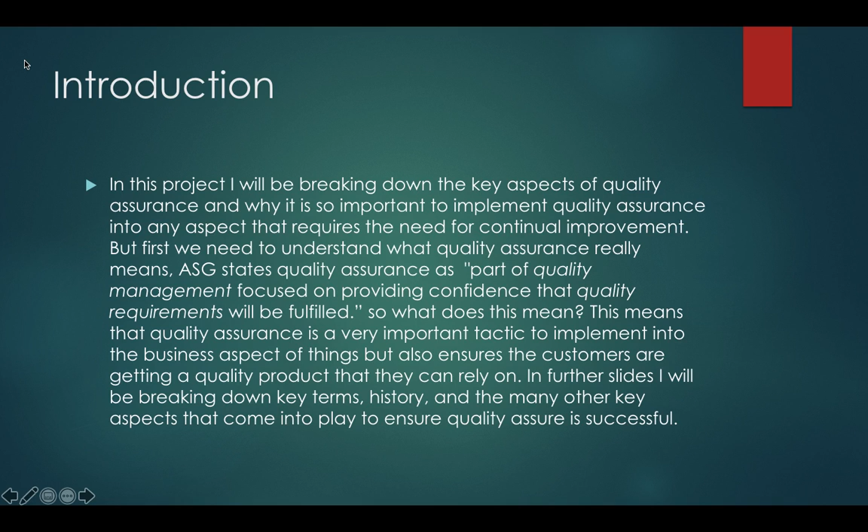In the introduction to this project, I will be breaking down the key aspects of quality assurance and why it is so important to implement into any aspect that requires continual improvement. But first we need to understand what quality assurance really means. ASG states quality assurance is part of quality management focused on providing confidence that quality requirements will be fulfilled. So what does this mean? This means that quality assurance is a very important tactic to implement into the business aspect of things, but also to ensure that customers are getting a quality product they can rely on. In further slides, I will be breaking down the key terms, history, and other aspects that come into play to ensure quality assurance is successful.

Key terms: Quality control is a system of maintaining standards in products by testing a sample of what is being made compared to what standards the product should have. Inspection is a process of measuring, examining, and testing to gauge one or more characteristics of a product or service, and comparing these with specific requirements to determine if any nonconformities exist. This can be somewhat like quality control, where we're seeing if any defects exist and what we need to do to eliminate this problem.

Auditing is a process to make sure products are complying with quality requirements and that every product is getting done correctly for quality assurance to the customer, but also to the company. This can be more than just examining the product for conformities. It can also be auditing the process being done or the team members completing the project to make sure they are being as efficient and effective as possible.

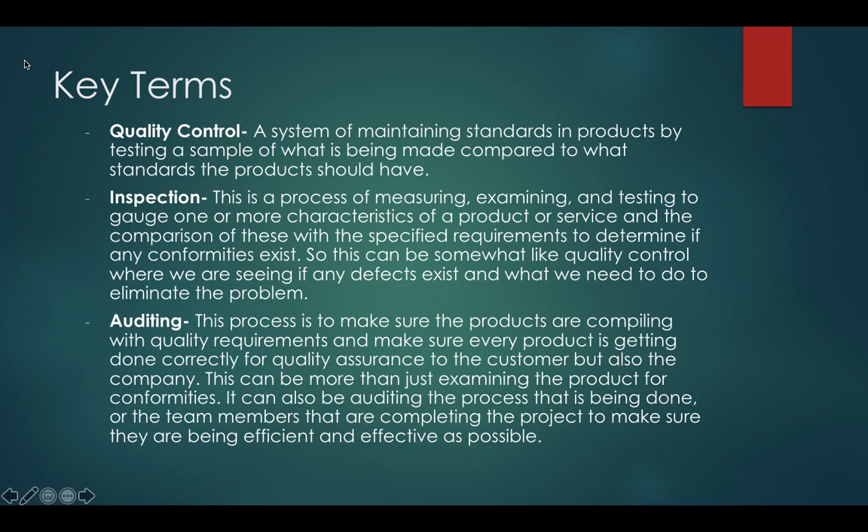Total quality is more focused on the management of people used to achieve continual improvement in customer satisfaction while still achieving low cost. Six Sigma: the concept was founded by an engineer named Bill Smith who worked for Motorola. Six Sigma is a set of tools and techniques for the overall continuous improvement of a product and the elimination of excessive waste. Kaizen Blitz is an intense and rapid improvement process in which a department or team members work together rapidly to complete a project in a short amount of time.

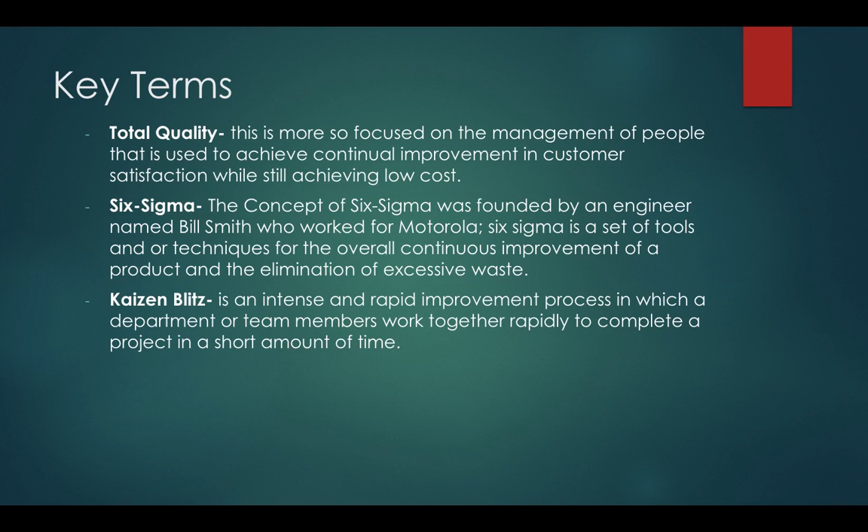History of quality assurance: 12th century. This is the first place where we were seeing quality assurance form. The birth of the quality assurance method began in the 12th century in China during the Zhou dynasty, where governmental departments were given the task and responsibility of overseeing the production and manufacturing of materials to execute upstanding quality standards by supervision and inspections.

History of quality assurance: 13th century. It can be traced back to the Middle Ages. In the late 13th century, craftsmen workers started to organize a special workforce that is still in place today. They were called guilds, known as a union. The guilds were responsible for making strict guidelines that implemented the importance of producing a quality product. They soon implemented these rules by placing a mark on the product to signify the quality of their work. This process worked great until the early 19th century when the Industrial Revolution took place.

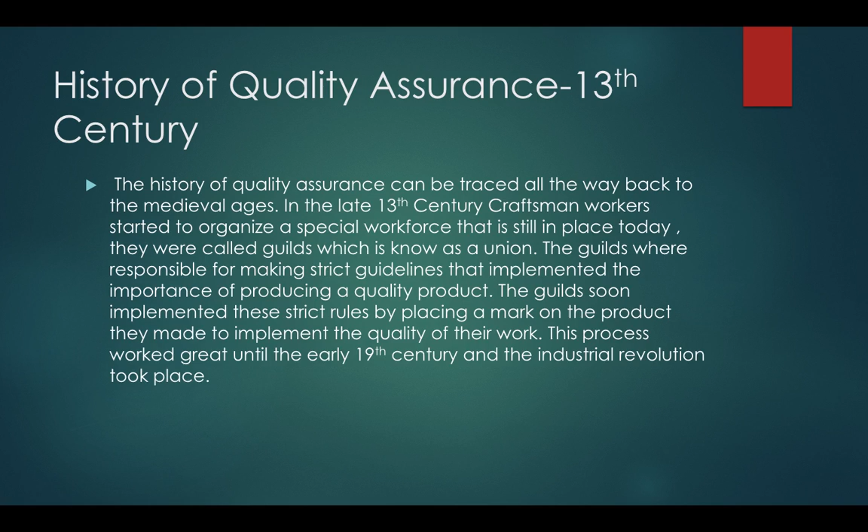History of quality assurance: 19th century. Firstly, we need to understand the importance of two people, W. Edwards Deming and Joseph M. Juran. They played a key role in introducing the concept of quality control in the manufacturing industry in the U.S. Henry Ford was also a very important figure in the Industrial Revolution and manufacturing industry, being the first to adapt Deming's idea of quality control. By doing this, Henry Ford produced a higher quality product that people could rely on.

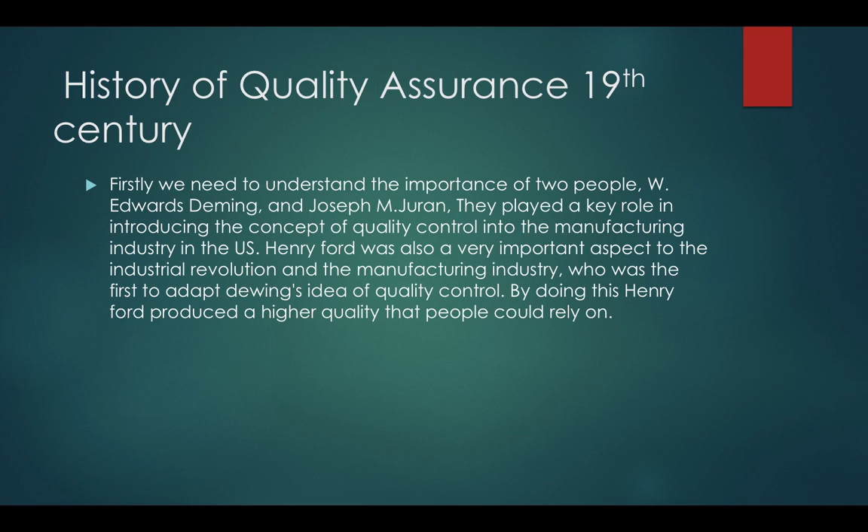Quality management systems: first we need to understand what quality management is. According to ASG, quality management describes a formalized system that documents processes, procedures, and responsibilities for achieving quality policies and objectives. There are many benefits when looking at quality management and how it can be useful to every aspect of the overall success of an organization. The main goals are eliminating waste, preventing mistakes, lowering overall cost, engaging the overall workforce, and always working towards the goal of continuous improvement.

Poka-yoke can be identified as mistake proofing, a process of using automatic devices to avoid human error. This concept was developed by Japanese manufacturing engineer Shigeo Shingo, and was very crucial to the success of quality assurance and lean in general.

There are two main aspects when looking at this topic: prediction, which is recognizing a defect is going to occur and demonstrating a warning sign, and detection, which is seeing that a defect has happened and stopping the process from carrying on.

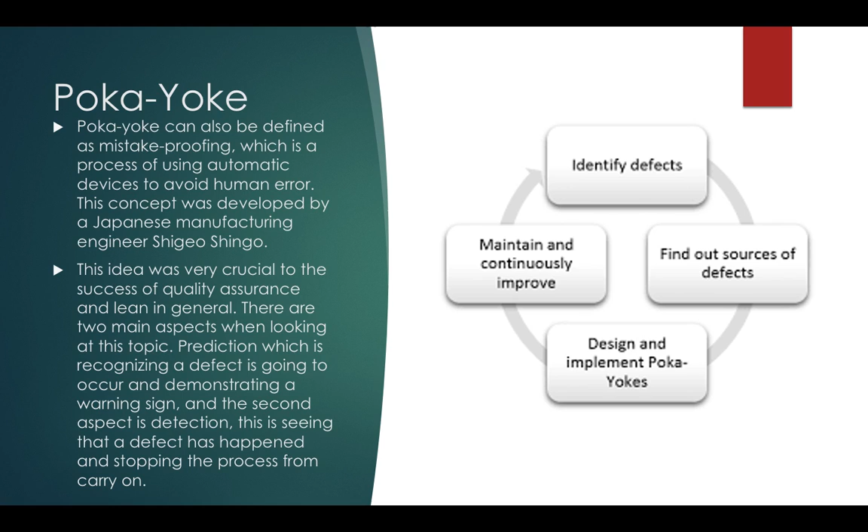So if we look at this chart, we first identify defects, find the sources where these defects are coming from, design a plan and implement Poka-Yokes to ensure these problems don't happen again, then maintain and continuously improve.

Kaizen. What is Kaizen? It is a method of philosophy looking toward the goal of continuous improvement. This philosophy was created by Toyota in the early 1980s and was very beneficial to the assembly line process. If a defect or problem was detected, the whole line would shut down until it was fixed.

Quality control. Dr. Kaoru Ishikawa, the founder of the 7 quality control tools, defines quality control as consisting of developing, designing, producing, marketing, and servicing products and services with optimum cost, effectiveness, and usefulness, which customers will purchase with satisfaction. Quality control is a very important aspect of quality assurance in general.

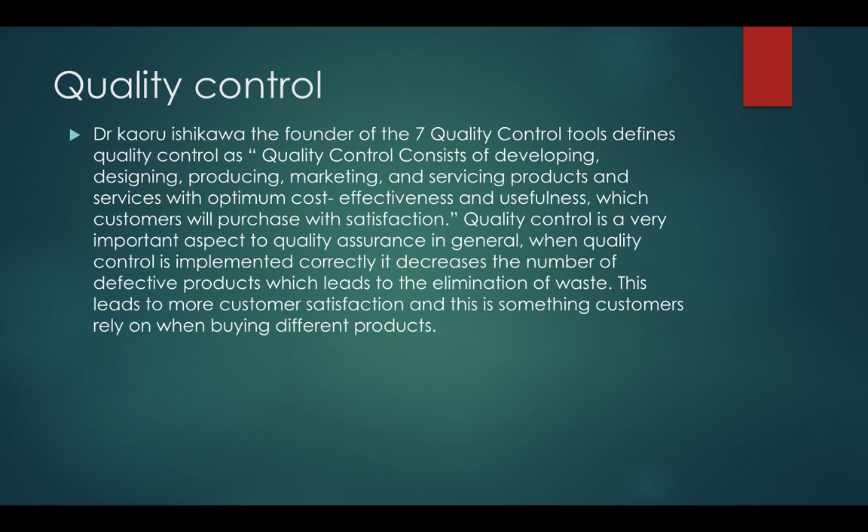When quality control is implemented correctly, it decreases the number of defective products, which leads to elimination of waste. This leads to more customer satisfaction, and this is something customers rely on when buying different products.

Quality control tools: cause and effect diagrams, also known as fishbone diagrams. This diagram is useful because it shows possible causes and makes them visible, so we can put them into different categories where they fit.

A check sheet is a structured form for collecting and analyzing data. A control chart is used to study how a process changes over time. A histogram is the most commonly used graph, which shows frequency distribution.

A Pareto chart is a simple bar graph that shows which factors are more significant. A scatter diagram graphs pairs of numerical data, allowing you to locate relationships between different variables on different axes.

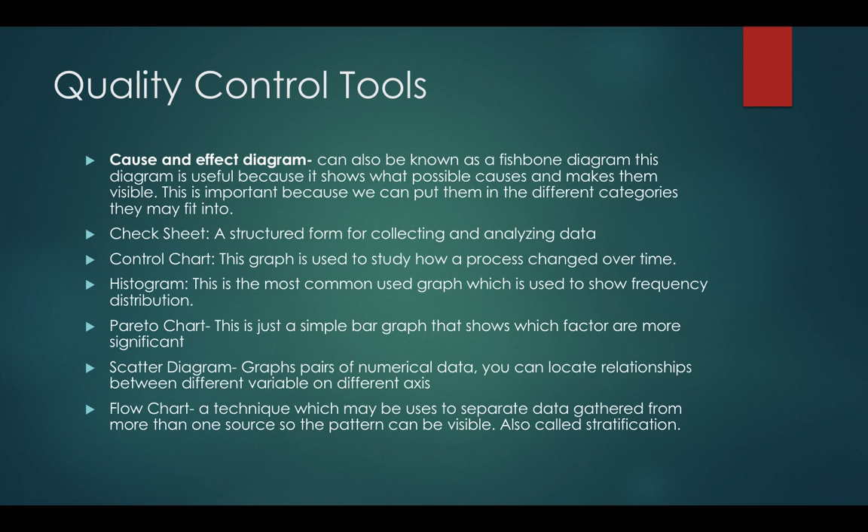A flowchart is a technique that may be used to separate data gathered from more than one source so that the pattern can be visible, also called stratification.

Six Sigma is a unique and important part of ensuring quality assurance. It is very important to the business aspect of improvement that focuses on the elimination of defects and errors that occur in a manufacturing background. It also puts a lot of focus on the customer satisfaction process that needs to be developed.

Six Sigma can be used by everybody in the company. Plant managers or workers can use it to eliminate waste and improve quality. Another example would be human resources, which can use it to be more effective and efficient when hiring new employees.

The second level is green belt. They assist the black belts in analyzing quality problems and work towards a common goal. The third level is black belt.

At the black belt level, we know the philosophies and principles that Six Sigma relies on to be successful. The last level is master black belt, which trains or coaches black belts and green belts.

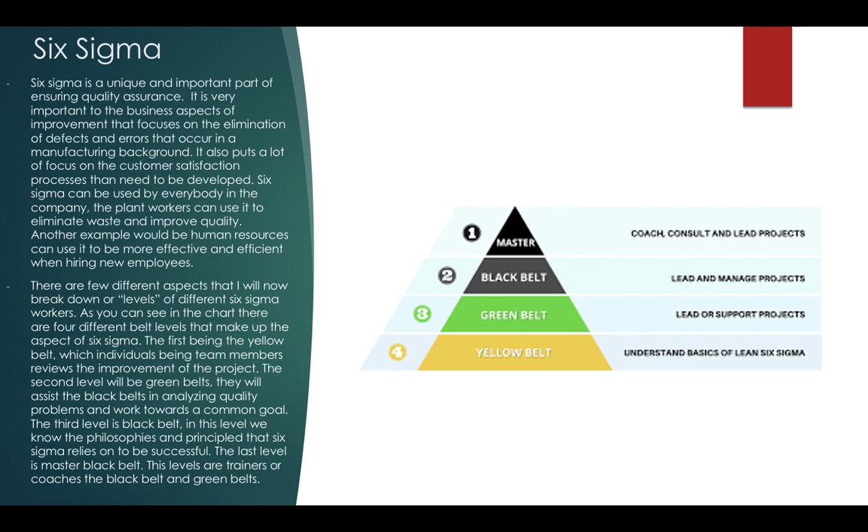The DMEDI model is very important because it breaks down the key aspects of a new product and shows the steps to ensure the desired quality of a product will be met.

Define: understanding the purpose that needs to be developed by a goal statement, generating plans and resource identification. Measure: understanding the outputs needed by examining the customer's needs and competitive analysis. Explore: using creative techniques to develop alternative concepts and evaluating customer requirements.

Develop: this step is used for process and production design and/or testing. Implement: fully use the new process that was created, and test to see if the process stood up against the customer's needs.